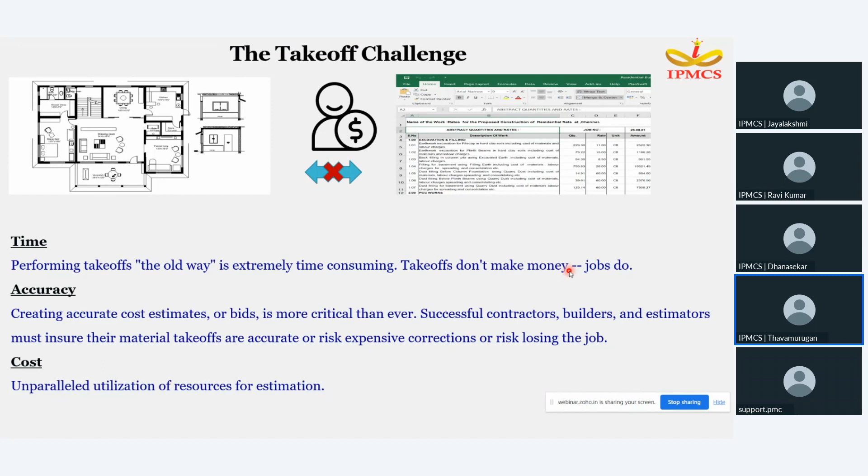PlanSwift offers paperless productivity - time is money. With PlanSwift, you don't need to drive across town to pick up plans, saving your time and money. You also have the honor of knowing you are helping the environment by saving trees and reducing waste.

Let me tell you an interesting piece of information about PlanSwift on this day and date. Today, 29th Friday - in the year 2021, 11th June, a Friday, PlanSwift released a new version, 10.3. This added more features such as batch scaling, notification icon, and shape count features.

Also, in the year 2020, March 13th, Friday, the PlanSwift team made a new initiative to start a blog. This helps people work from home during the pandemic situation. They also introduced a 14-day trial period license to reach every quantity surveyor.

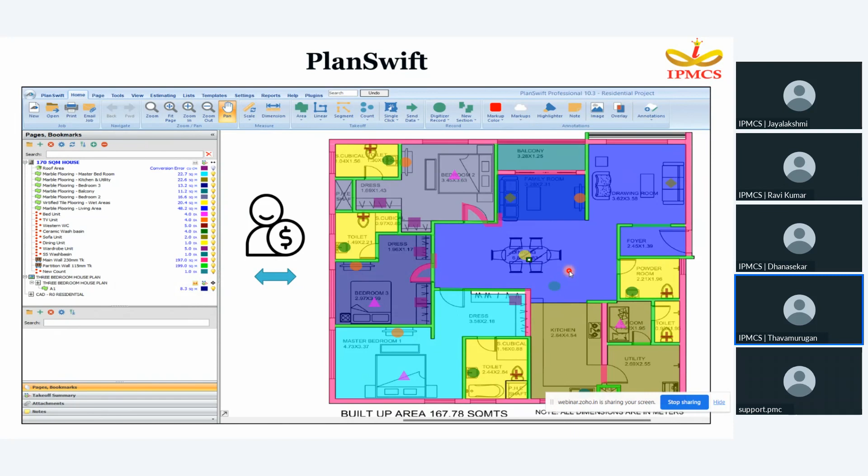Here, you can connect your drawing file to your estimation layout in this particular PlanSwift. There is a collaborative platform - while you are doing your estimation with respect to your quantity part or cost part, you can collaborate on your drawing.

Also, you can reduce your manual error. Nowadays, we do our quantification in a conventional methodology - we refer to some CAD drawing, then pick values in numbers, then we go on to do that BOQ. So manual error is more.

So here in PlanSwift, there is accuracy. Also, 40% of the time, it is cost effective.

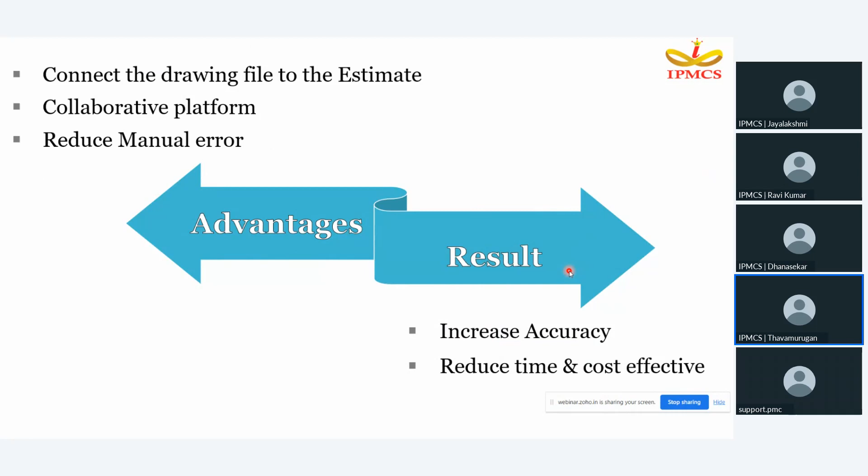PlanSwift is compatible with all major digital blueprint formats, including drawing, AutoCAD file, PDF, as well as JPEG file. If you are in the pre-tender stage, some quantity surveyors will get so many files in PDF format only, so at that time you can utilize that PDF format to prepare your quantification part.

Quantity takeoff by on-screen takeoff technology. With PlanSwift, there is no need for old-fashioned rulers and highlighters - just point and click with your mouse to calculate square footage, linear footage, or item counts.

PlanSwift can also calculate curves and cutouts and more. Your accuracy will be much greater, and it's easy to make sure you have done the takeoff correctly, because if it is colored, it's counted.

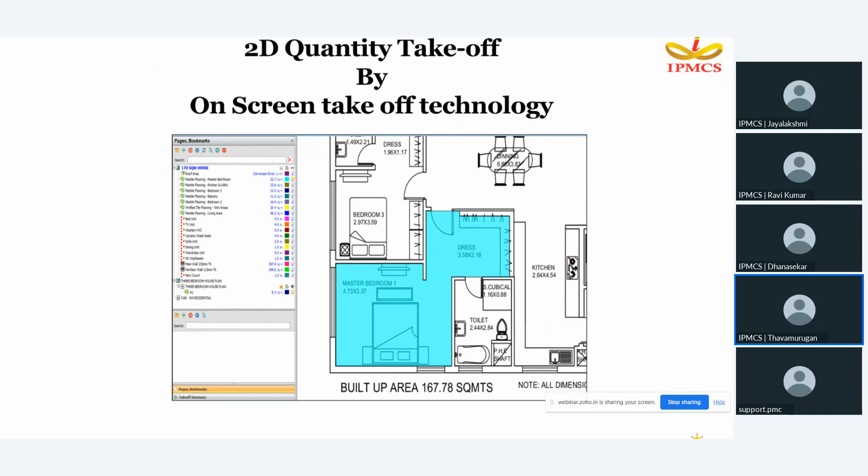Here are some of the templates for you. I can tell you there's concrete works, masonry, flooring, electrical, HVAC, landscaping, openings, etc.

This is not only for the civil industry - it works with oil and gas as well, and also the MEP sector. So all quantity surveyors can do all kinds of critical quantification within a time limit.

You can use this inbuilt template, or otherwise we can customize our template also as per our industrial needs.

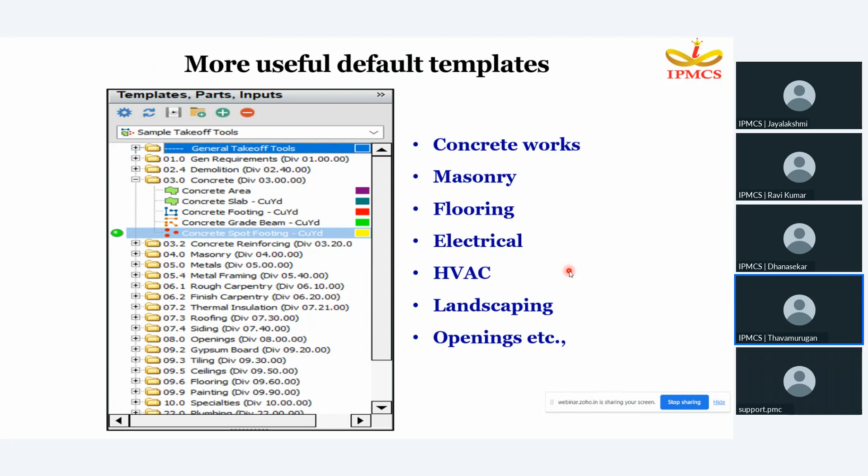So, as I already told you, there is a customizable template. Here you can customize your template for your quantification output. Each and every organization, like L&T or Tata, has some specialized format for that quantification, so in that scenario, you can make that template as per your company needs.

So some people, once they've done some quantification, need to take multiple answers - you want to extract multiple answers when doing that particular quantity takeoff. So in that kind of scenario, you can make your customized template here in any part.

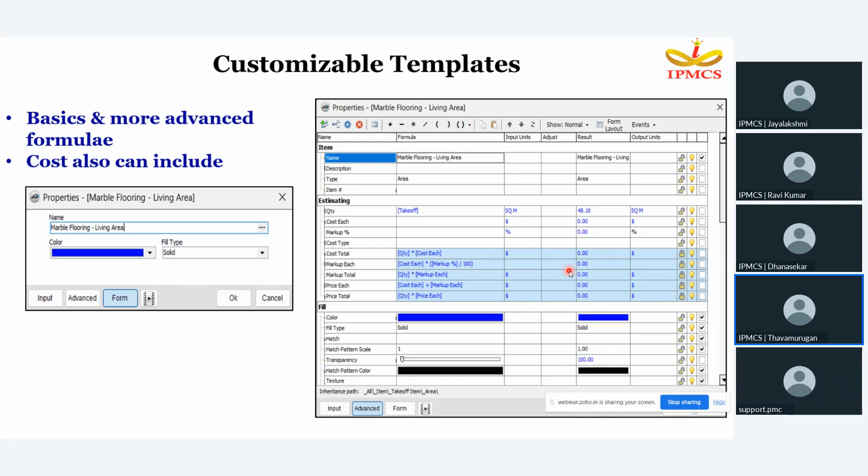You can also add your cost, your budgetary, your organization's budgetary cost, and consider that while doing this estimation part. So all of this is a snapshot from PlanSwift only.

Once you've done that quantification part, then you are going to make your report to your organization. By that time, in conventional method, we are using Excel to make that BOQ, bill of quantity, per format. Here, you don't need to make that particular column organization.

There is an inbuilt natural estimate layout. So once you've done your quantification, it's already interconnected with this kind of natural estimate layout, and from this you can export your document as a report. You can utilize this format for any kind of tender also.

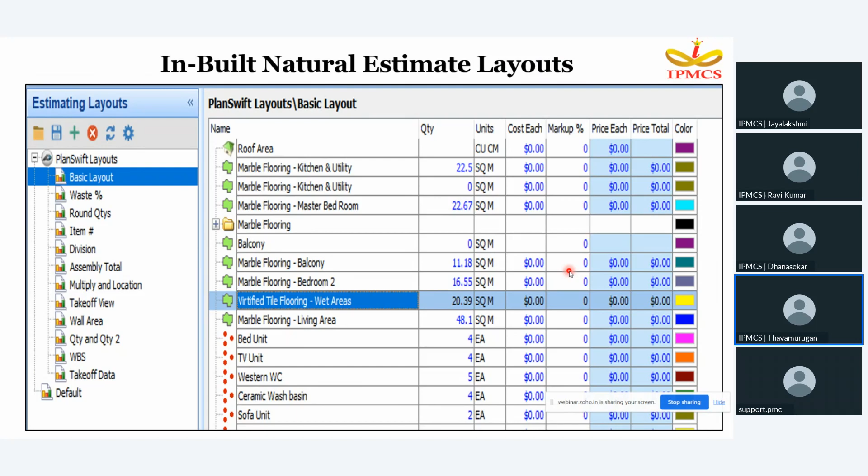So from that estimation part, you can convert that part to a report. Either you can export that file to particular Excel or PDF, whatever format.

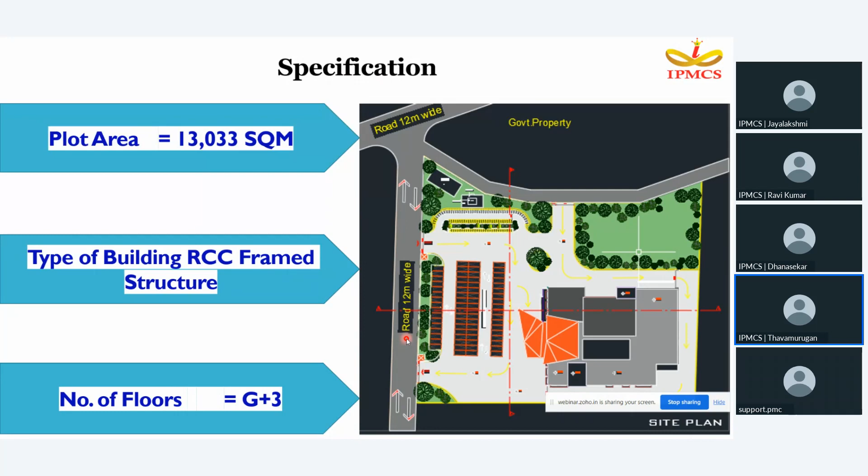In this case study, today we are going to do these kinds of quantity takeoff parts: A, B, C, D. One of the items in part A: fiber glazed canopies, AAC block masonry, SS handrail on stairs, furnished items, reading chairs. This one is the plan view and this one is the section view.

Later I will come with the cost part, okay?

This one is fiber glazed canopies. At the entrance, that building entrance or main part, we will have this kind of canopies. Fiberglass is a composite material made from fine glass fibers and resins, known for its strength, durability, and versatility. When used in canopies or awnings, it provides several benefits.

So this outcome of the quantity is in area, that means plan area. This is not vertical area, plan area only. Plan area means that all quantity surveyors will know length into width of the object. Okay, let's do this with our PlanSwift for this particular configuration.

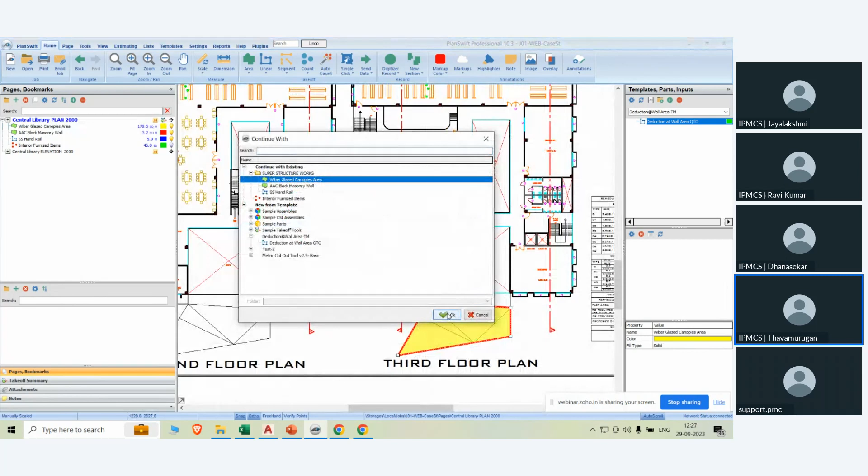So I have to choose this fiber glazed canopies area. Next, in 2D plan view, I'm having that particular object, not a square or rectangular, this one is some irregular shape. So you can do any kind of irregular shape also with this point mode. So you will get that particular quantity here.

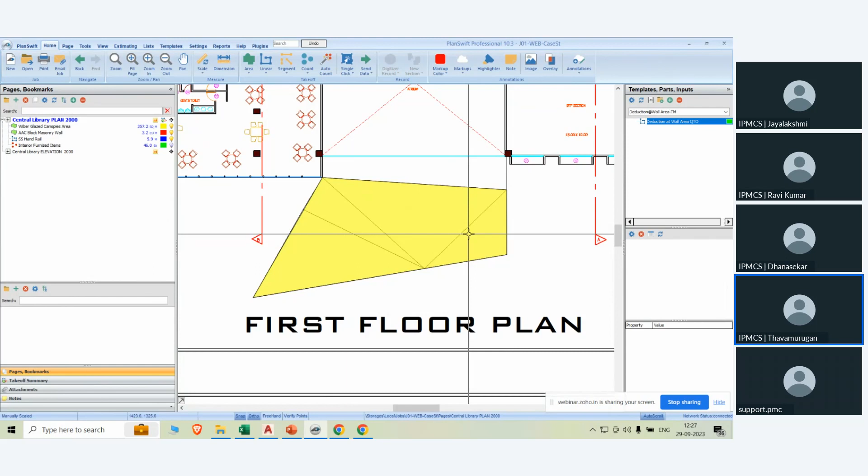Also, you can continue. I am doing this right click and I am using this continue option and I am selecting my template.

In my keyboard, I used the close option, C enter. So finally, I got that area of the canopy.

Here you don't need to bifurcate what is the length and what is the width. Nobody will ask what is the length and what is the width. In normal way also we are doing like this now in conventional methodology. So here you got your area with any kind of irregular shape. Like this only we can develop our configuration for any kind of plan area part.

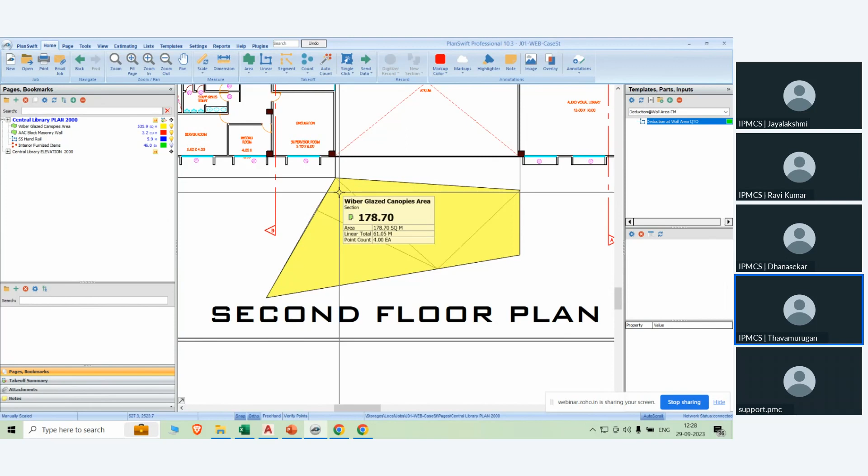This is one of the examples for this particular case study. You can develop that area if you are going to do some flooring work, you can make that room, and all corner points you can connect with help of this point mode option. But you should develop this template, or you can utilize that existing available template.

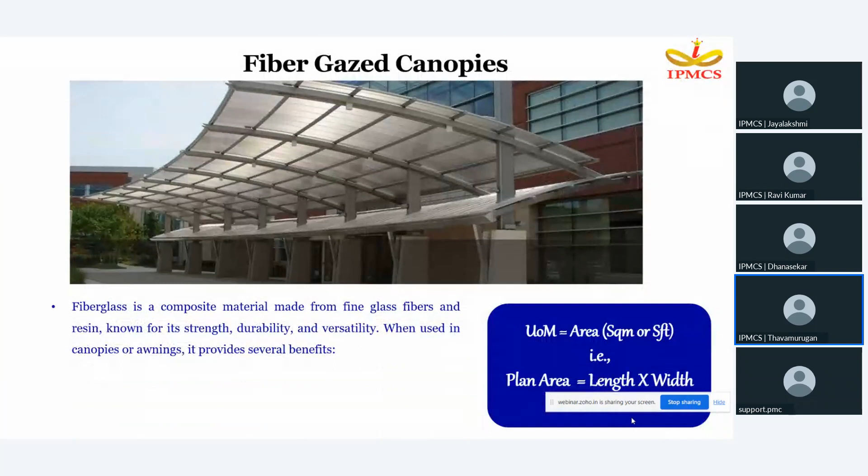Let's move to the volume concept. Today I took the AAC block masonry. Hope you know that AAC block - autoclaved aerated concrete block. Masonry refers to the construction method in which AAC blocks are used as the primary building material for walls, external or internal. There are so many different standard sizes there.

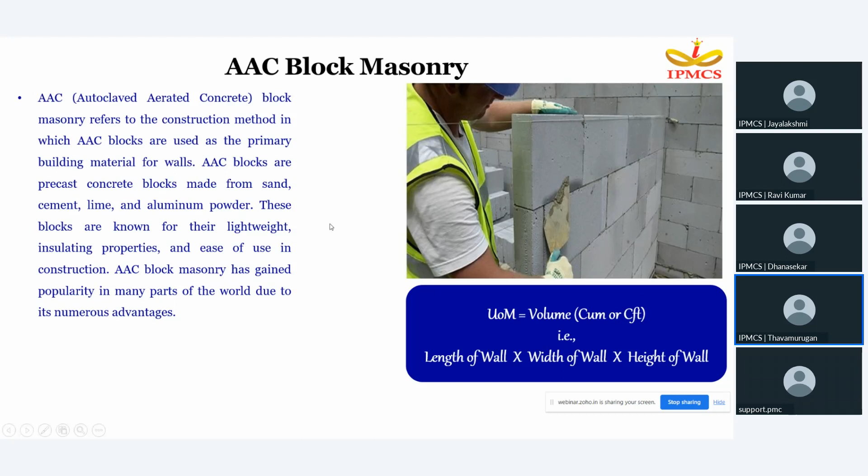So what is the quantity output for this AAC block masonry? Today we are going to do it by volume concept. Volume means length of the wall, into width of the wall, into height of the wall we have to do. Let's see in PlanSwift.

These all, all external and internal walls having AAC block only. So for you, I'm going to do some individual wall.

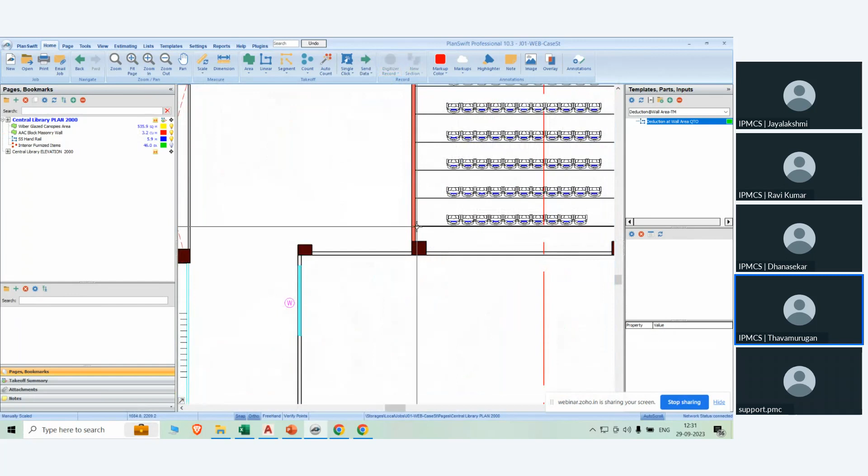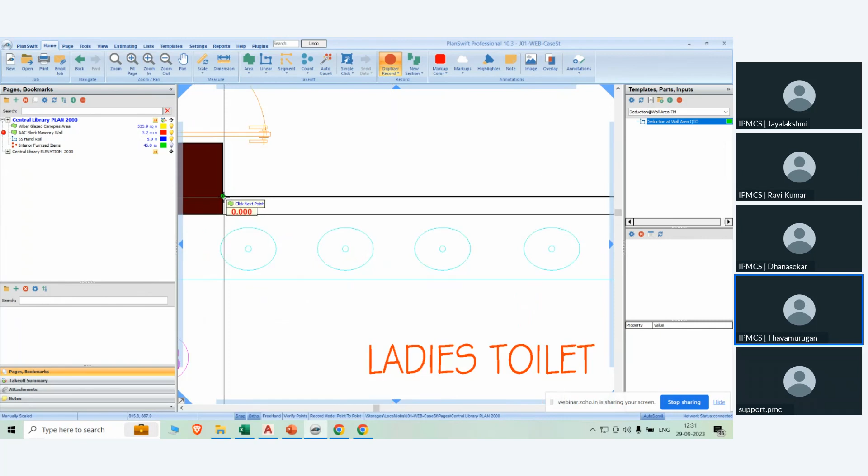You should select the template first of all. For each and every item for your quantification, you must develop your template first. From this template, you can start your quantification work. Let us take this wall, pillar to pillar. I am tracing that area of the wall.

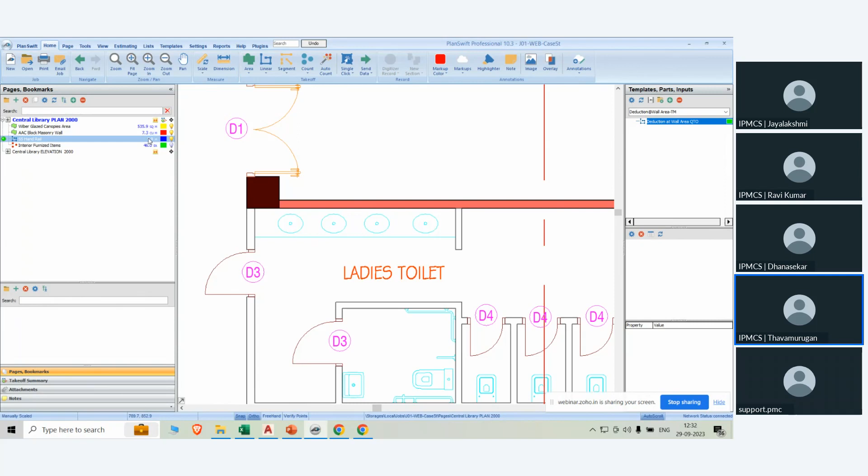But finally we need volume only now. So you trace that area of the wall. I already gave in this template, by default the height per floor is 10 feet - 10 feet means 3 meters. So once you created this template, you can just track that particular object by the area method.

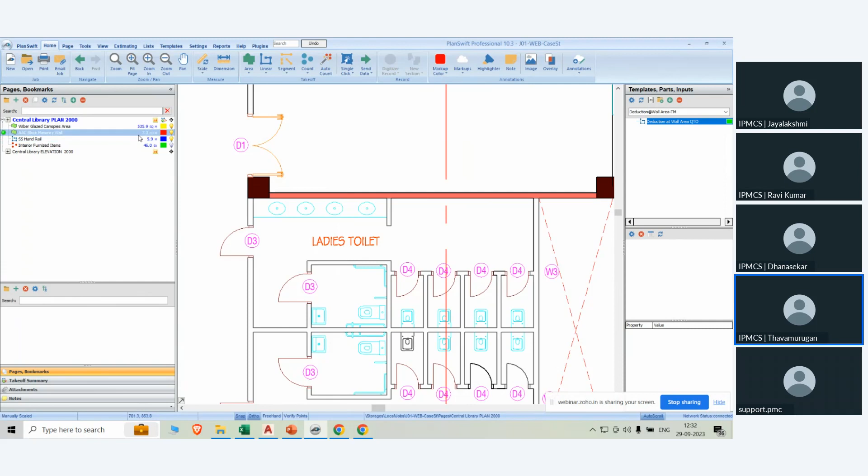Once you trace that area of any kind of object, now we trace the block masonry area, then I multiply by the height of the wall. So now I got 7.2 cubic meter. Like this, you can do your volume concept - not only AAC block, if it is concrete also, we will do by volume only. This much cubic meter, like this - area multiplied by height of the particular object.

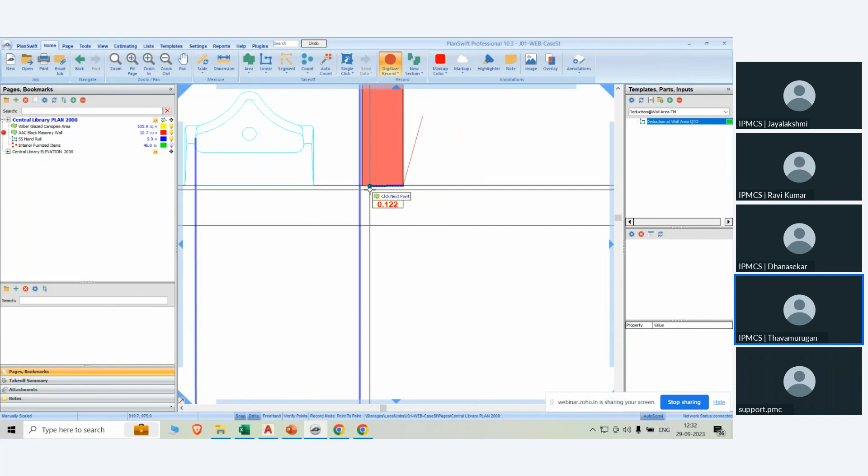So you can trace n number of volumes like this. You should select that template, that's all. You have to create that template as per your need, otherwise you can utilize that available template also.

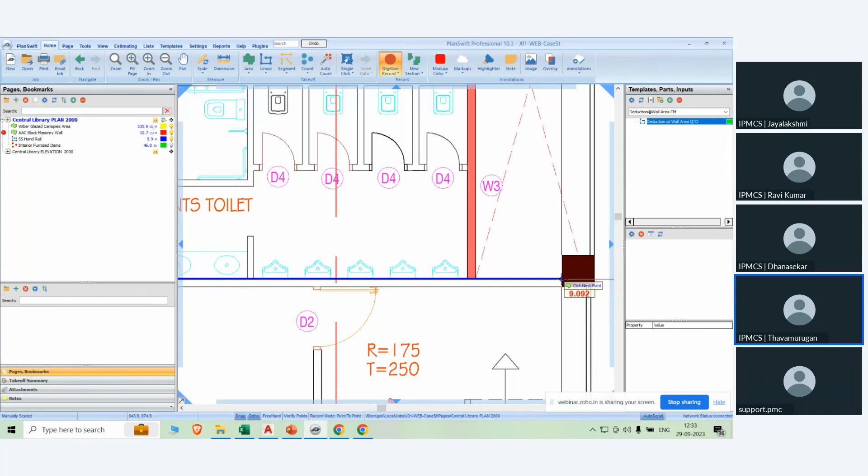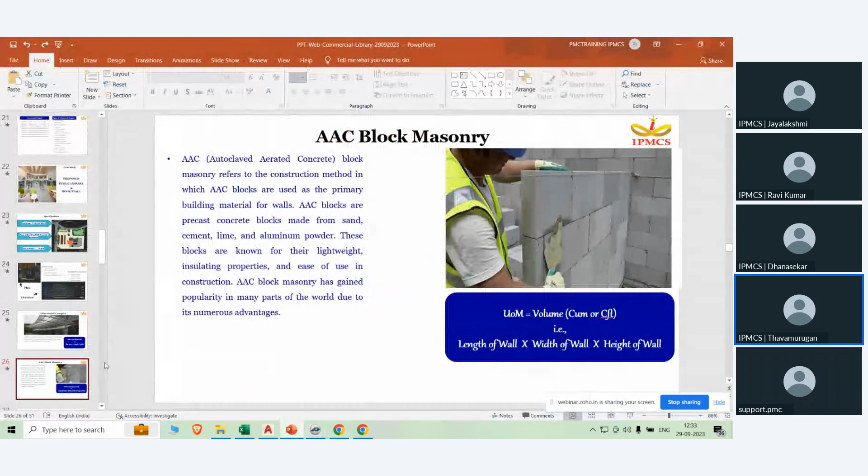That's all. So when I go to click one by one, it will keep adding here. Let's move to another concept - there is an SS handrail on the staircase area.

Most of the time in normal quantity survey, we do it not on a weight basis - there is a standard height, some 0.9 meter or 1 meter height. I'm telling here 1 meter or 0.9 meter. So people always do it by linear measurement concept - they take the length of the handrail, length of the waist slab for this particular staircase. It's going to be from ground floor to terrace. It's not an issue, but we need linear measurement. So finally, we will measure by running meter or running feet only, correct?

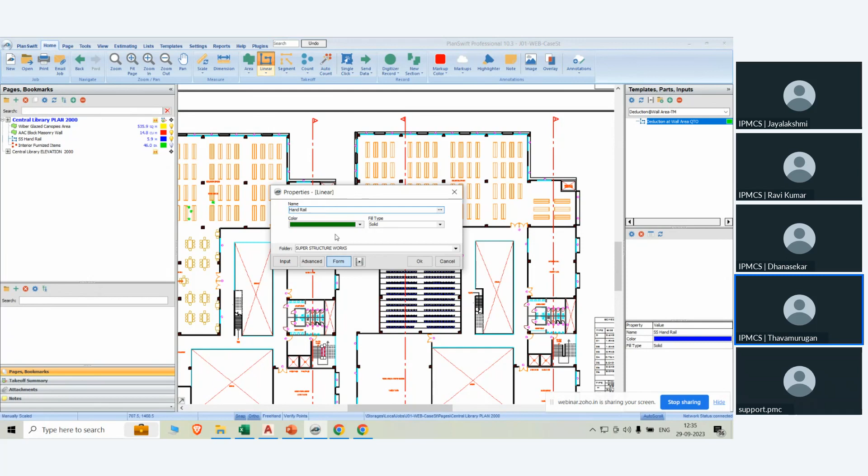So that's the one we are going to see now in this PlanSwift. Let us take PlanSwift - any stairs. Here I will tell, this is the template. You can type the handrail part. This is the stair, so for this particular ground floor level, I am taking the length of the handrail part.

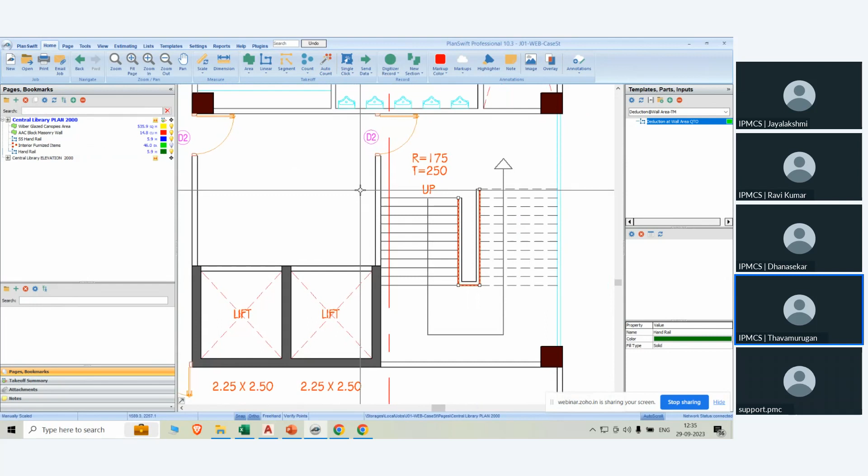Roughly I got 5.9 running meters. So like this, using the linear measurement concept, you can develop n number of quantifications. If it is any room, you can take it in the civil engineering category - there is a skirting work, tile skirting work. Simply you can trace the length of the wall. That's all, same like this kind of handrail measurement.

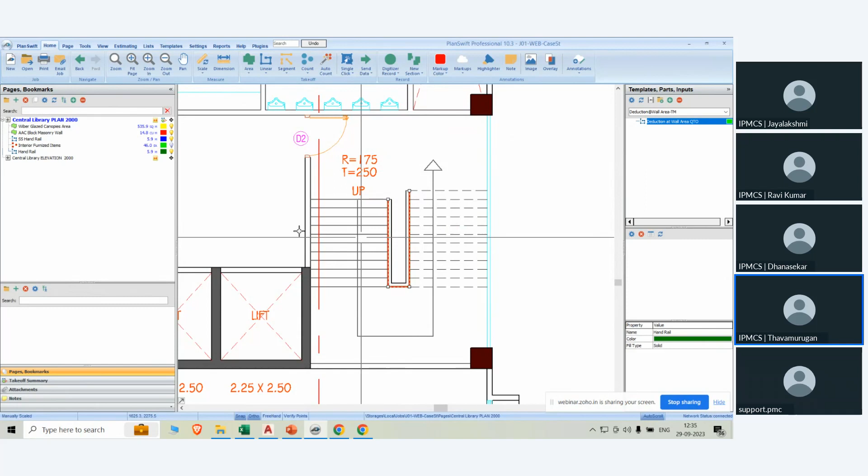You need to develop first of all that template. Once you're done, you can directly go to your drawing part, then you can trace that quantification.

Let's see another concept for quantification in this particular case study. So here, this is reading table cum chairs. We are going to do countable items. We will count that table or any kind of furniture, so it comes under the interior part. For most items in this furniture category, we will count this much number, like that only.

So that's the same kind of scenario. Here we took some reading table cum chairs in this particular case study. So for this, numbers are used as the unit of measurement. In this scenario, if you have a large scale drawing, you have so many different chairs or tables or other furniture items.

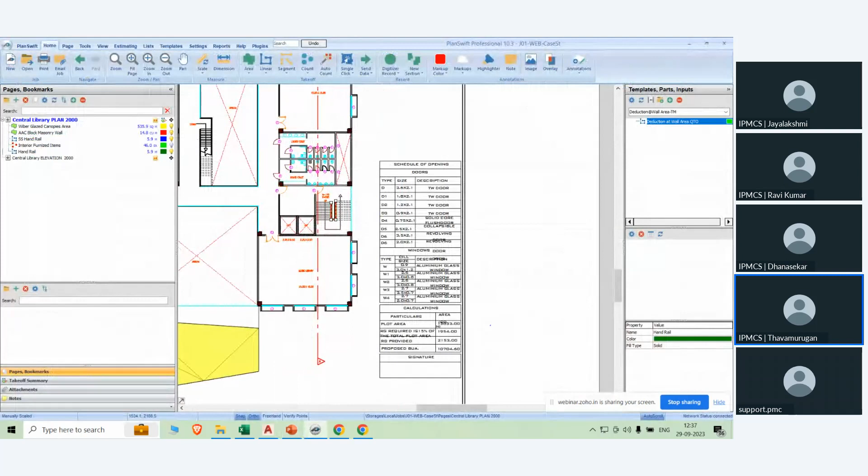So there is, you know, that counting option - it will take some time with our traditional method. So here, in on-screen technology, we have such a feature: the auto count option.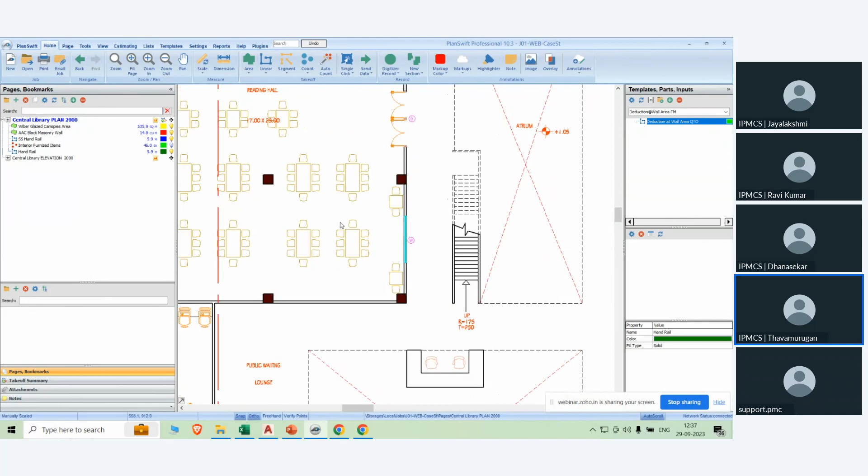Let's take all of this in 2D plan. Hope you can see this - all reading table cum chairs. Let's take this kind of chair first of all. So now I am having G plus 3, I already told you G plus 3, so I am having 4 plans. So each and every floor has a reading table cum chair.

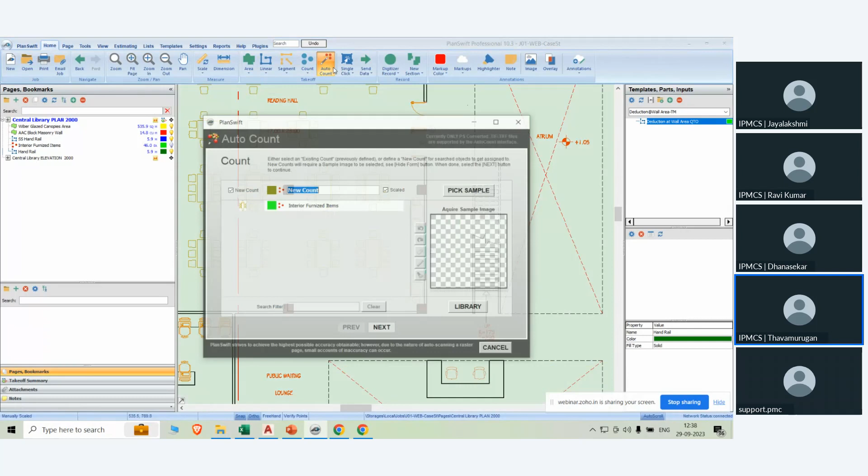Let's try with this auto count option. Please select that auto count option, and there is a pick sample. Just you can trace the object, you will get here, and do next.

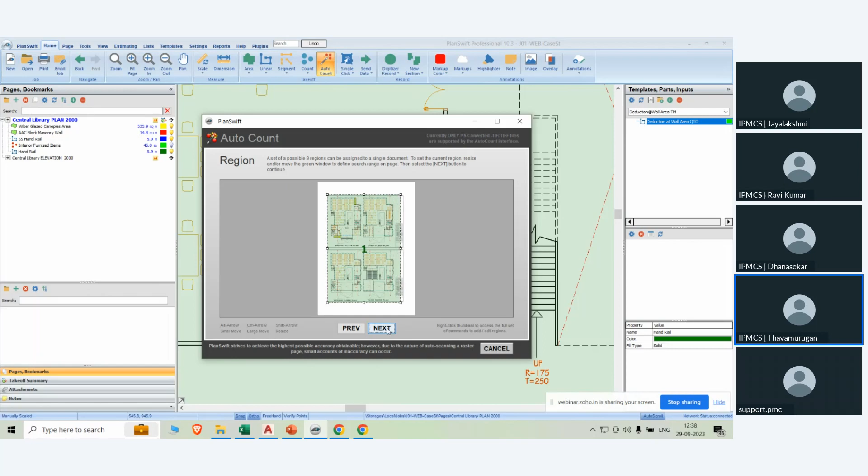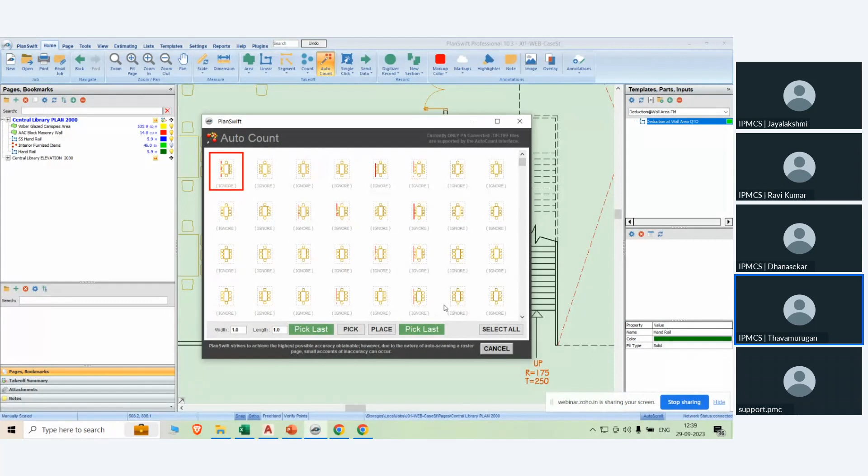You can adjust your boundary in your project drawing like this. Give next. Here you can check whether it brings all your selected items. If it is not similar, you can unselect. So here I got all the same only, so I can give select all, then I'm going to click this pick option.

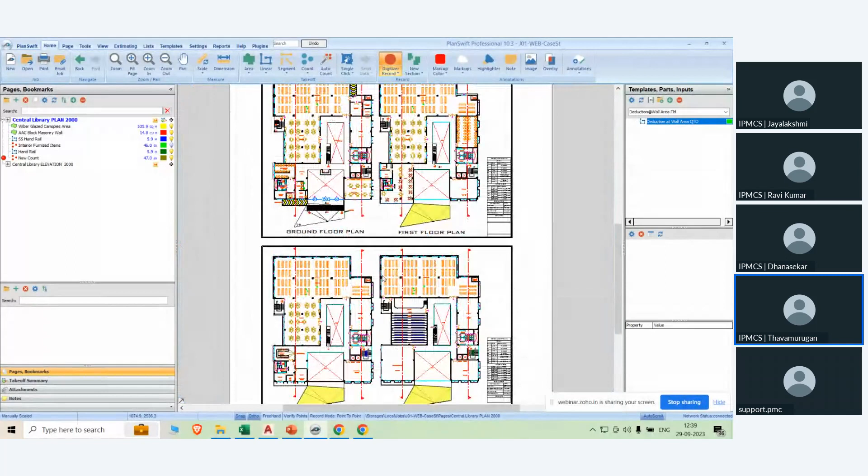Now you can see I got 47 number. You can zoom out, from this all floor you can rename it that one. Now we counted reading table cum chairs.

So it's a furniture item, that's why we took the numbers concept. Give okay. So like this, you can do your n number of concepts like area, volume, length, count, whatever.

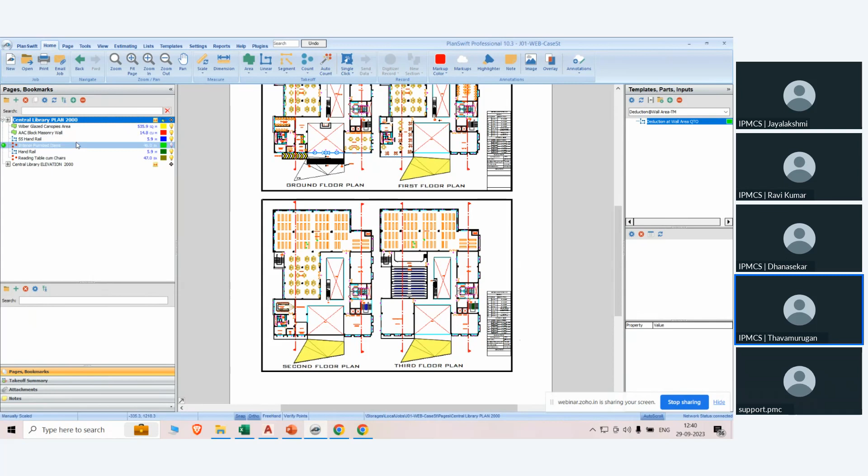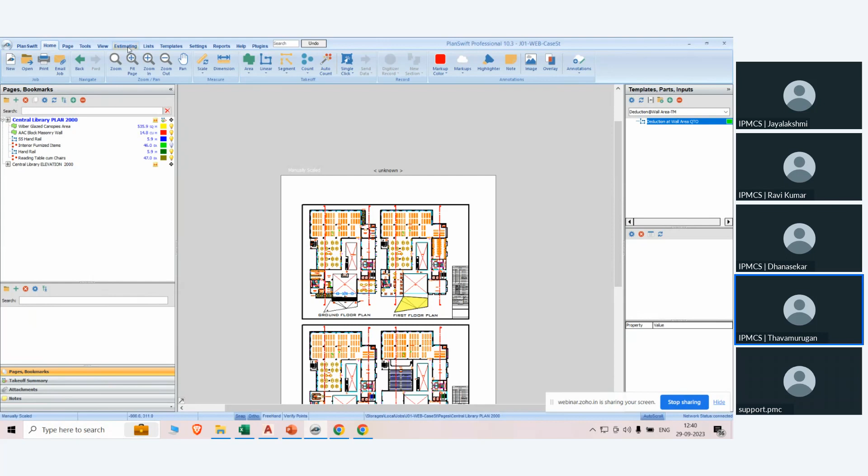See, already we've done that quantification part - that already comes under this estimation layout. Here you can rename it with the particular section name. If it is terrace floor or third floor, you can rename it, and so on.

You can customize your tabular column while clicking this option - right click option. You can customize what things you need. Yes, all people know that BOQ needs proper description column, quantity, units, and rate part.

This one is our approximate cost for what we did today. So fiber glazed canopies per square meter is 4,575. Like this, I listed out some approximate rates.

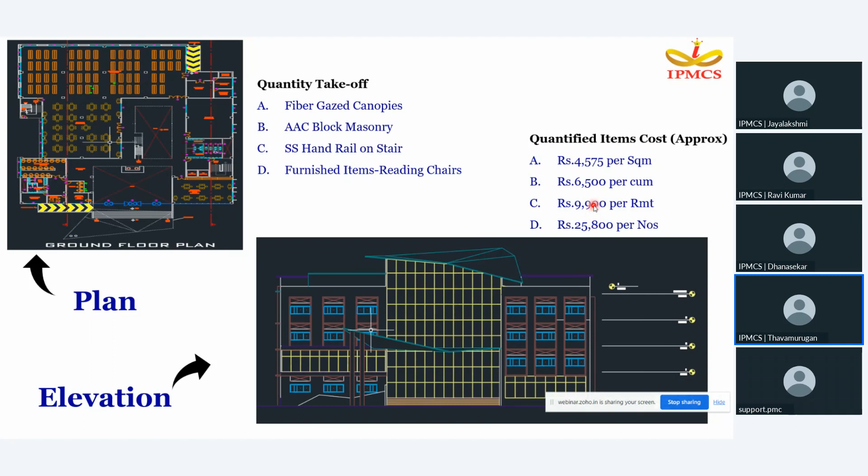So this I am going to use in my estimation layout sheet. I can enter manually 4,575. But that time you have to go to the template part, so double click in this advanced part - there is a properties layout. Here, cost each - I can type our cost.

It's the final result, you got that particular unit rate. Then you will get the value of the particular quantified items.

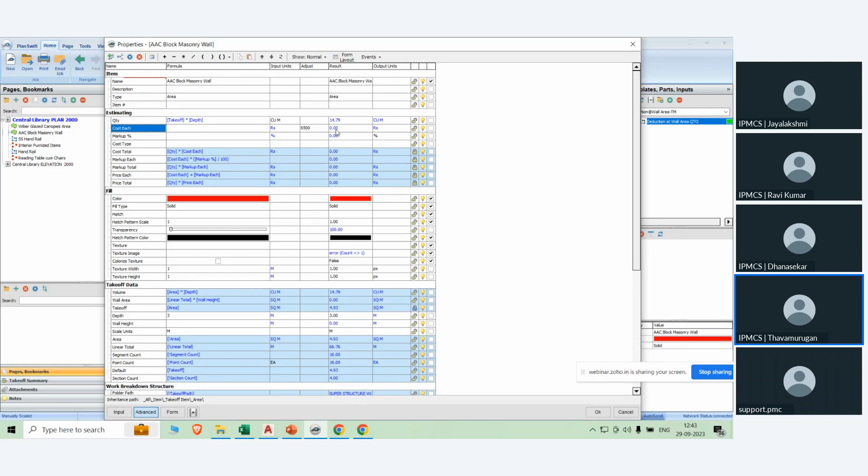So for AAC block, if I want to give a rate, just double click and go to the advanced option - there is a properties box, there is a cost each option. So here you can give per cubic meter cost roughly 6,500 rupees, and give OK. So let's see that value of the particular quantified item like this.

Like this, you will get your estimated value. So this much, once you've done your quantification as well as your estimation part, you can develop your report.

For that scenario, there is a report option. These are the available templates in PlanSwift. You can go with any kind of option as per your organization's need, or you can make customization also.

Not only do you have that available template, here also by report we can develop our customized template format. So if some company will need some proper breakup, that kind of exercise, yes, we can do here.

We have to give some input for this creation of this report template or configuration template also. So this kind of report you can generate, you can convert that format to Excel or CSV as well as PDF format also.

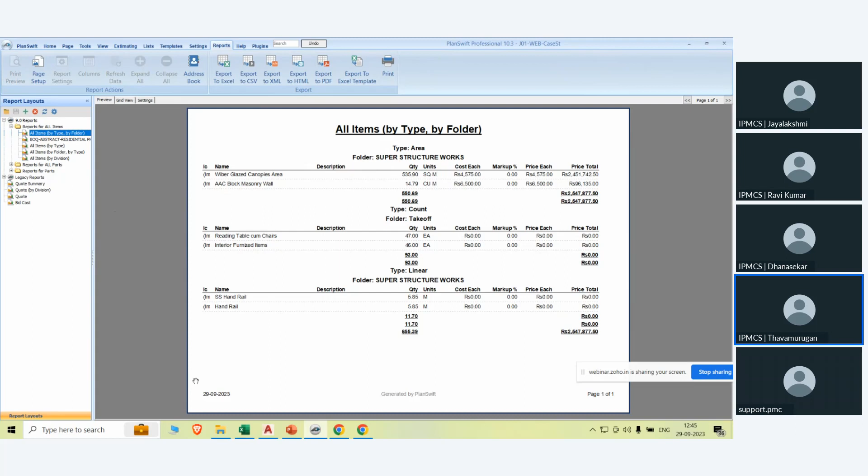I'm going to move my presentation screen. So some of the highlights I need to share with you about this PlanSwift.

There is a power to scale option. Now you can scale any digital drawing easily, regardless of what the printed scale of the blueprint is. Once the page is scaled, you can click any 2 points on the drawings to calculate measurements, providing more accuracy than a scaling ruler.

Some of the PDF, JPEG or PNG format, sometimes you may not get proper scale part. For that scenario, you can utilize this scale option. Here is that option. Here we can customize our drawing sheet, either in drawing paper or drawing format or PDF.

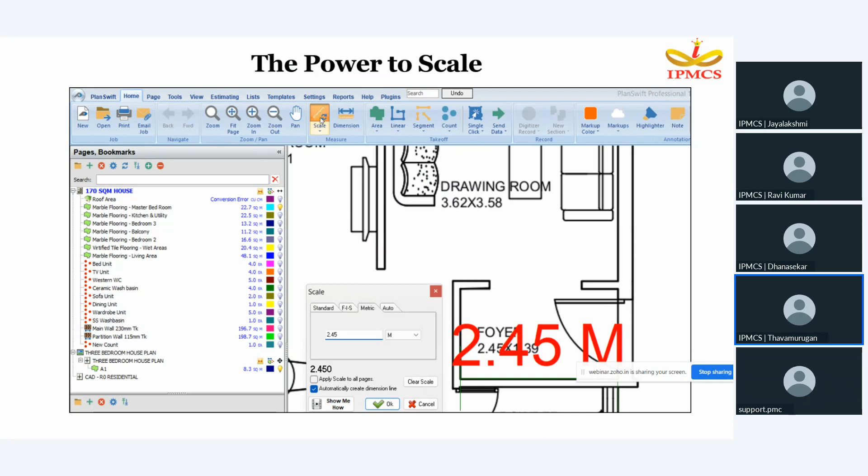There is a comparative overlays, either your R0 drawing and R1 drawing. So you can compare the takeoff or estimates from different estimators to ensure accuracy. Also create as many overlays as needed with PlanSwift, so easily identify error, difference or changes. Quickly double check your work.

Easily find what changes on planned revisions. Compare new and old revisions of the same drawing.

In the tender stage, we will get some tender drawing. When you are going to execute that particular project, you may get that GFC or VFC drawing, good for construction drawing or valid for construction drawing. In that kind of scenario, already you created some quantification, but suddenly you may get some revised things.

Yes, with this comparative overlay option, you can identify whether those changes happened easily.

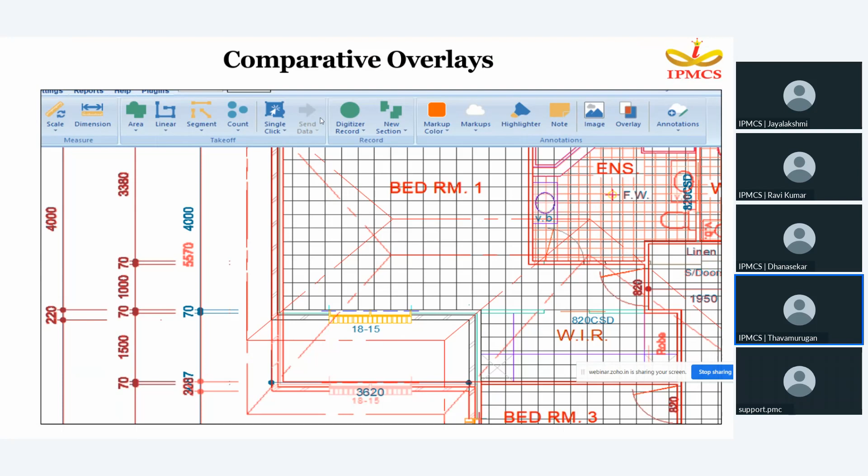Here, in the settings option, you can customize your keyboard shortcut keys. Normally in any tool we have standard shortcut keys for some tasks - if it is in Excel, control C means control copy only. Here, not like that - you can customize your shortcut keys as per your need.

So that kind of feature is available in this PlanSwift software.

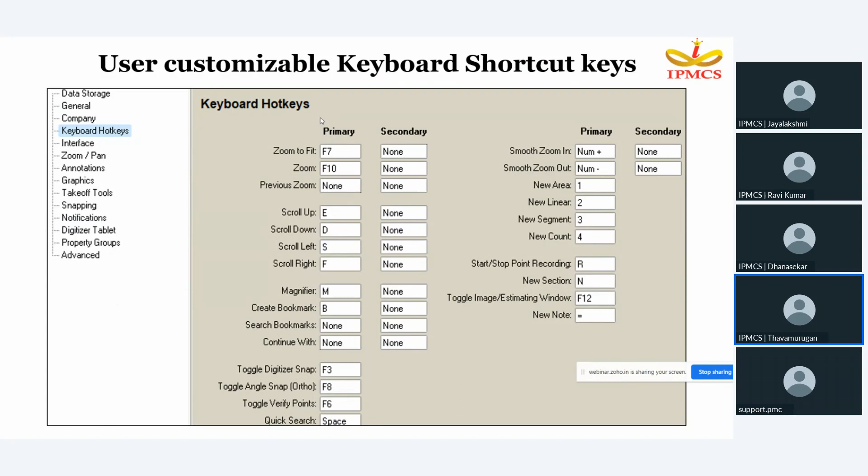In this PlanSwift, if you go into that website itself, you may get a lot of plugins for any kind of industry, like oil and gas industry, or MEP or civil construction, whatever. So there are so many plugins available.

From those plugins, you can achieve more accuracy for your project quantification, as well as major time savings. Mainly for the time savings purpose, people are going to use this kind of plugin options. Either if you are in very big tunnel work, you can use this earthwork plugin.

So there is an Earthwork Pro V3 option. That kind of plugin, as I already told, has a pre-functioned template. From this template, you can do your quantification part within your time limit.

Once you reduce your time, yes, if you are in the EPC sector, you can produce n number of projects.

Nowadays all quantity surveyors are facing that time problem only. So during this time, you can utilize this plugin option, or otherwise you can do things as per customization template. From that also you can do your configuration part.

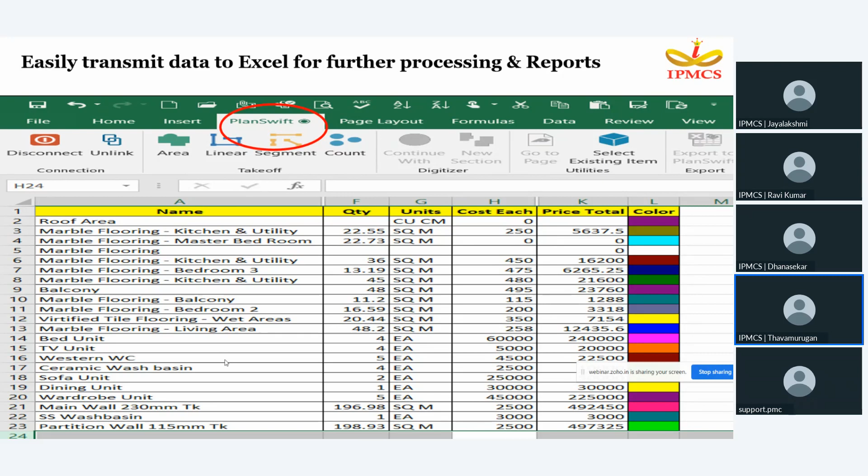Finally, you only have to do the quantification part. That quantity cell, you can transfer the data to this particular Excel sheet. There is an easy way to transmit your data, Excel to PlanSwift or PlanSwift to Excel. That transferring of data, cell wise, segment wise, you can connect your data to Excel as well as Excel to PlanSwift.

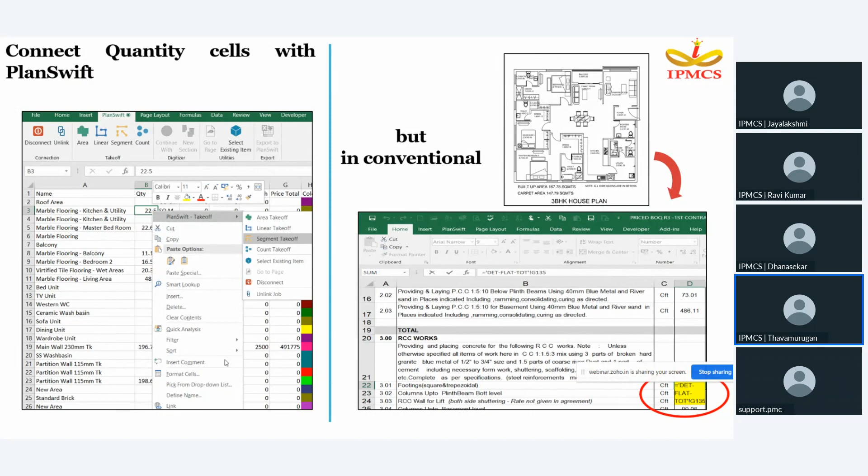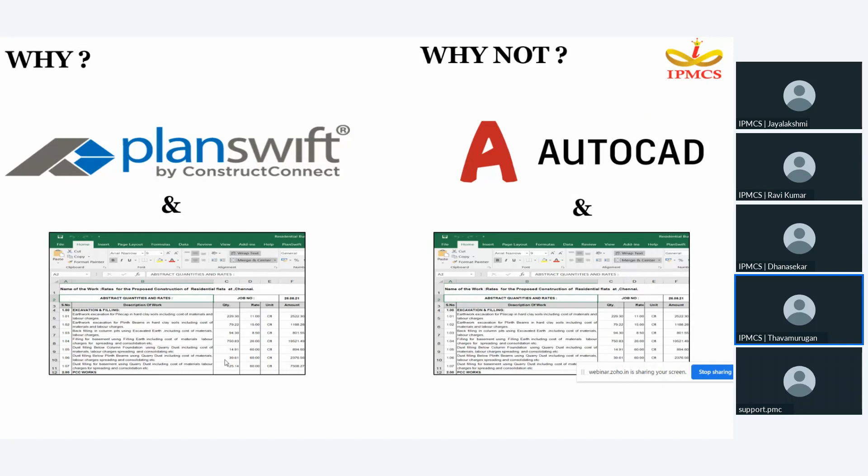So hope you understand why PlanSwift and Excel, and why not AutoCAD and Excel - that is the difference. So, other features.

Sometimes we will get some queries for this particular quantification part. People will write a request for information to your PMC. In that kind of scenario, you have to make some notes or comments on this particular quantification part into the drawing area.

In this, you can mention cloud-based comments, make rubber stamps like approved or GFC construction, and any kind of things like that. Also, there is dimensional checking with different colors, and you can customize that color as you want.

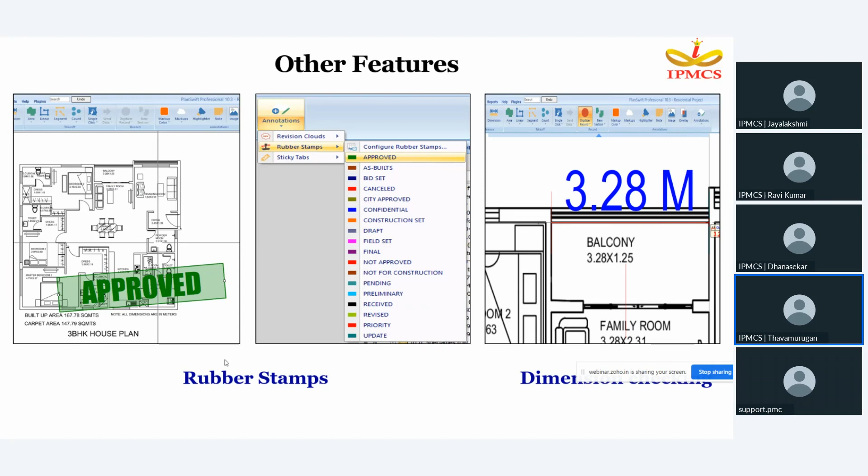Other features include revision cloud marking, sticky tabs, and review on revision notes. You can jump to another quantification part. If when you are seeing in the area part, suddenly if you want to review that quantification for area, from the estimation you can directly jump to your drawing.